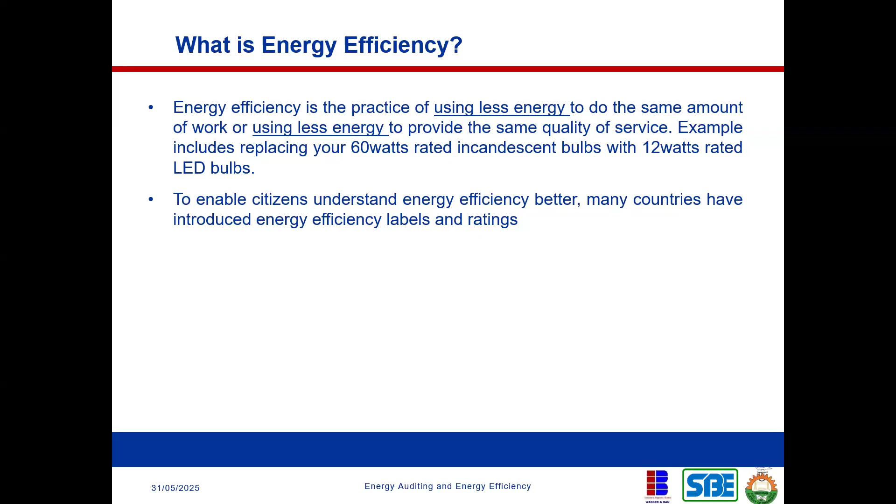Yes, we have them, but when you go to the market, when you want to buy an air conditioning system or a refrigerator, I don't see them. So these things already exist, but they are not fully implemented, right? So now these are examples of those kind of labels.

Now in America and some other parts of the world, you're going to have something like Energy Star. So depending on its efficiency, the more stars it has, the more efficient it is. Now that's Energy Star. Then the second one is the one for Nigeria. This is the rating for Nigeria, the building energy label.

So we have this already existing, not for all equipment. I know it's for air conditioning systems and refrigerators. I don't know if it has been extended to other equipment, but for air conditioners we have it, though I don't see them implemented. Then you have the third one. I think this is for India, I'm not so sure. Then this other one, I think it's for Europe.

So just to give you an example of what an energy efficiency label looks like, that's why I'm using these pictures to illustrate. So energy efficiency labels are logos or ratings used to designate or describe the energy consumption characteristics of a device or system. Now, this designation from a trusted agency means that the appliance exceeds the minimum energy performance standard, usually by a significant amount. Products without these labels are most likely inefficient in energy consumption. So this is the purpose of having the energy efficiency label.

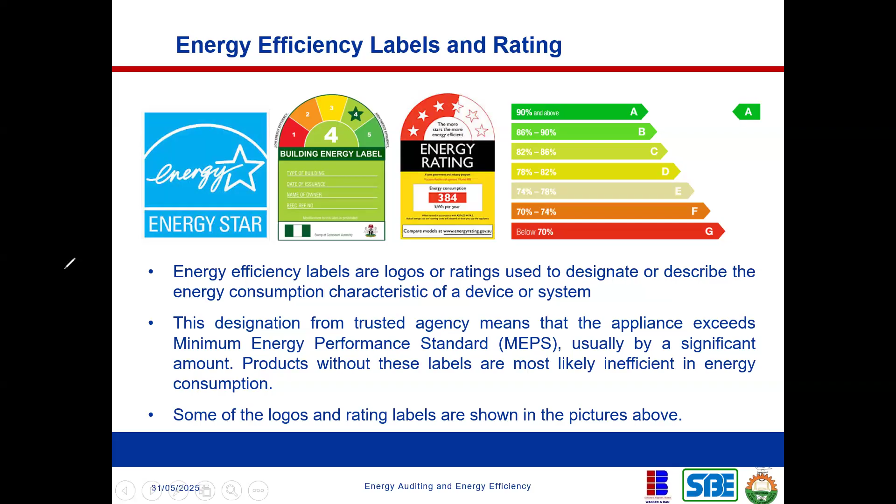Okay, so now let's look at the primary causes of inefficiency. So if you have your light bulb, mind you, even the energy efficient light bulb that we have today, the LED light bulb, does not mean that it has 100% efficiency, right? So it still has some level of inefficiency, but of course, it has been reduced significantly.

But again, the question is, what actually are the causes of this inefficiency in any system? So there are two primary factors of inefficiency in any system that you can think about. There is a human behavior factor, and then there's a technical factor. The technical factors are what we know as the technical losses. We are going to talk about this in a bit. But before that, let us look at how this comes together to affect the energy balance system.

So that takes us to an energy balance equation. As an energy auditor, what you're actually doing is energy balance. You have to look at all the energy that's coming into the building, and you try as much as possible to account for how all of this energy leaves that building, how the energies are expended. And that's what you do as an energy auditor.

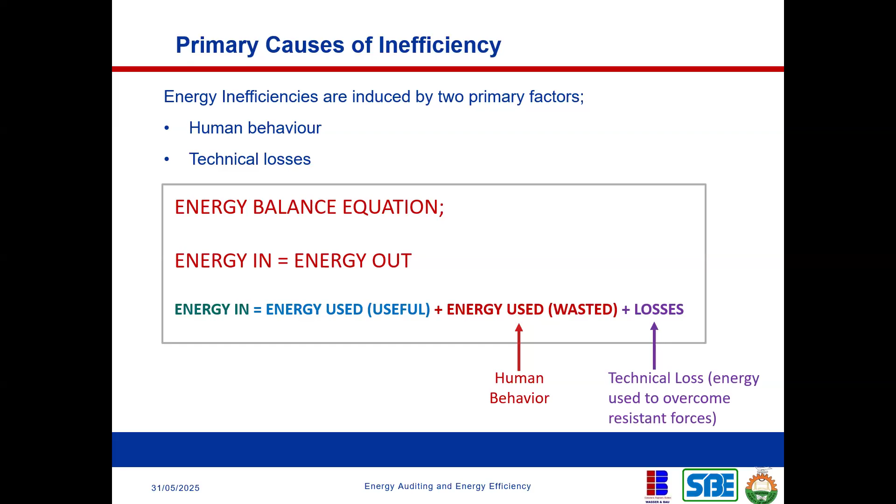So I was explaining this very screen and these primary energy efficiency measures, where I talked about the power and the hours. Do I need to go over this again? Please mute yourself if you're not speaking. So if you're able to reduce the power consumption of your appliance, for example the light bulb, if you change your 60-watt incandescent light bulb to a 10-watt LED, you've reduced the power. In that case, what you have achieved is energy efficiency, right?

But if you have done that and the 10-watt LED bulb is still on when there's nobody in that space, there is still waste, it's still an energy waste. So what you need to do is to turn it off when there's nobody. So when you turn it off, then you've actually done what we call energy conservation.

So energy conservation is the reduction in the hours of use of the equipment, while energy efficiency is the reduction in the capacity or in the power demand of the appliances. That's the difference between energy efficiency and energy conservation.

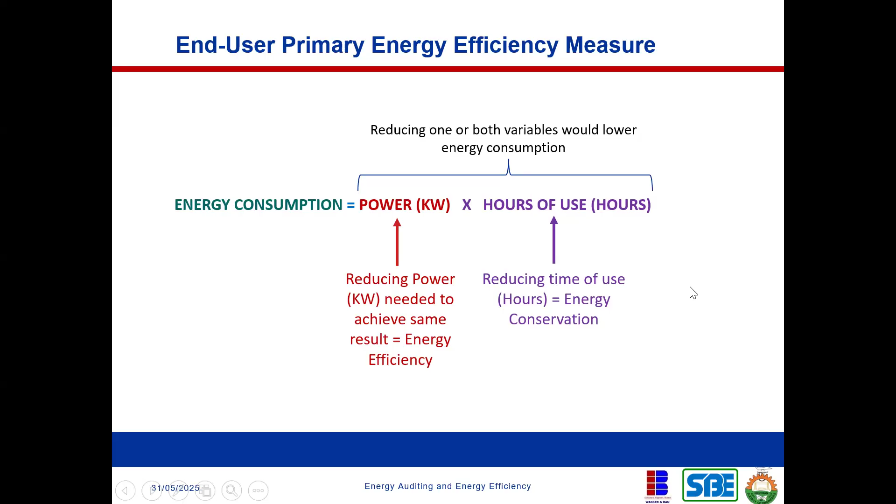So let's go into coefficient of energy efficiency. The formula for efficiency is the same almost everywhere: the useful output divided by the overall input. So in terms of energy, it's usually the useful energy divided by the total energy input into the system.

And how do you calculate the useful energy? It is actually the total energy that goes into the system minus the losses. Now, these losses include the technical losses and losses resulting from human behavior. When you do that, you can then actually see the real energy efficiency of the system.

So take an example of power production, maybe a power plant. Let me ask every one of us, what do you think is the efficiency of a diesel generator? What I mean by efficiency is, 1 liter of diesel contains about 10.7 kilowatt hours of electricity, if you convert everything to electricity. How much of that do you get from 1 liter of diesel? I want to get feedback.

Hello? Yeah, go on, please. There's nothing on my screen. Really? Is that the same for everyone? It is your network. No, it's fine here, I can see his screen. We still have coefficients of efficiency on our screen. Okay, so if you're not seeing my screen, then I think it's probably from your network. Now, unless you want to speak, please mute yourself.

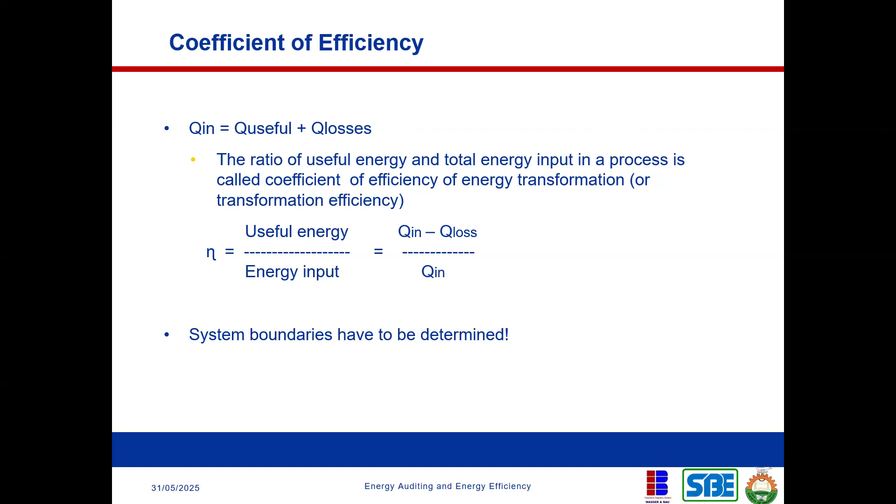Now, let's go into the energy efficiency in industries, the applications of energy efficiency in the industries. So when you go into an industry, what are you likely to see? You're likely to see a lot of motors. You're likely to see a lot of cooling systems. You're likely to see water pumping systems, compressed air systems. All of these are what you can see. You can see boilers and heat distribution systems.

So please mute yourself unless you want to ask a question.

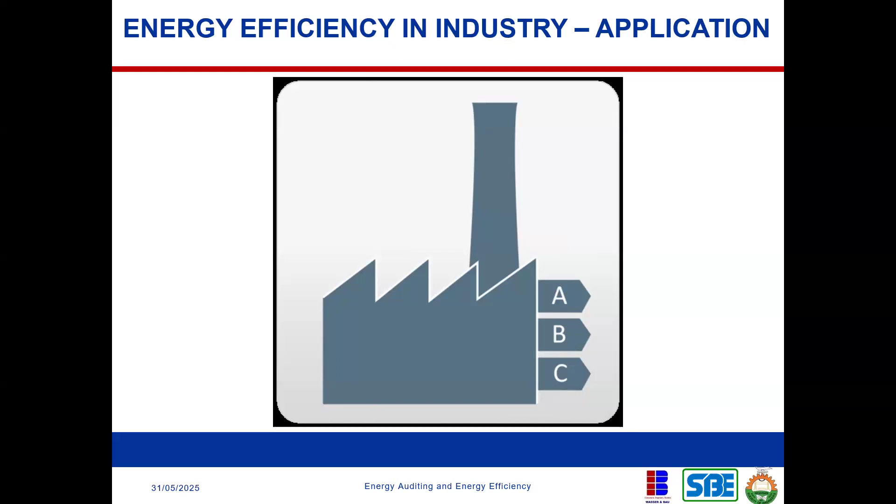So we're going to go through all of these applications, and then we're going to talk about the technologies and the energy system so that you can understand how they consume energy and things to look out for when you go out to these industries. So let us start from the very base, which is fuels and combustion. A lot of the time, this is where energy starts its journey, in the form of chemical energy, which is maybe petrol, diesel, coal, whatever it is, and they need to be combusted. They need to be burnt to free up the energy they have, and that energy has to be converted into different forms of energy.

So let's take an example, your diesel generator or your petrol generator. Let's take a petrol generator for an example. The petrol gets into the combustion chamber, and it gets burnt to free up the energy. So it's converted into thermal energy after the fuel has been burnt. That thermal energy is used to drive the piston, which is mechanical energy. Now that mechanical energy is used to turn the armature, which is actually producing the electricity. So you are converting from chemical to mechanical to electrical, which is the output.

So in all of these processes, you have energy loss. And that's why the efficiency of a petrol generator is actually lower than that of a diesel generator. But let's just come back to the industrial application. So combustion is simply a chemical process of converting hydrocarbon fuels to thermal or heat energy. It's a chemical process. It can be represented by a chemical formula.

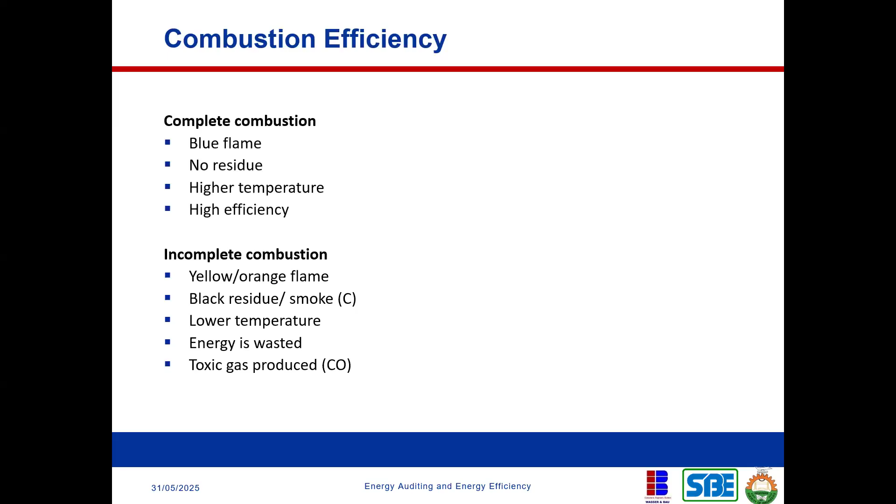So let us look at the combustion efficiency. Now, there's what we call complete combustion, and there's incomplete combustion. A complete combustion is where you burn all the fuel. Remember, in your combustion process, what we said is a chemical process.

If you have, for example, 10 kilograms of gas coming into your combustion chamber where it needs to be burnt up, burning up means you're going to split it up and release all the energy it contains. But if you're not able to achieve complete combustion, that means some fuel will go out without releasing their energy. So it impacts the efficiency of this process. The goal of combustion is to make sure you achieve complete combustion.

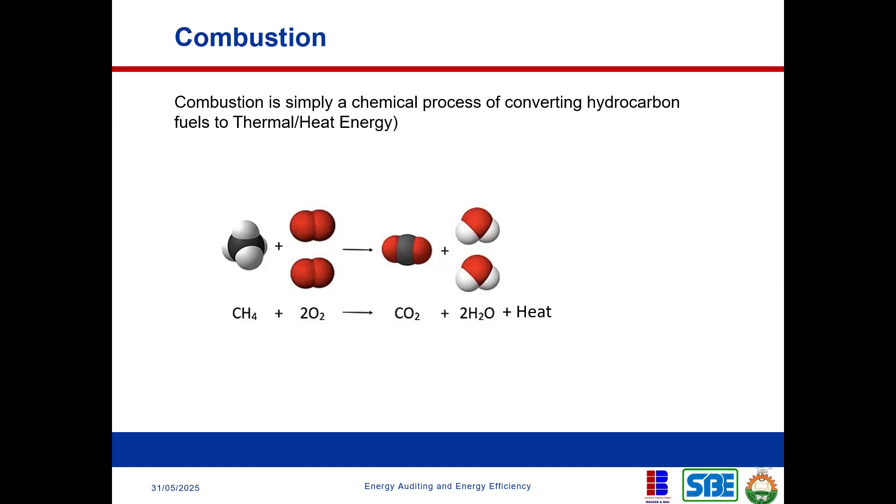So what are the things that hinder a complete combustion? Let me go back to that equation. If you don't have sufficient oxygen, you will not achieve a complete combustion. So this methane will not achieve complete combustion, and if that happens, what you're actually going to get here is carbon monoxide. Carbon monoxide becomes an indicator that we use to know when there is complete or incomplete combustion. We are going to come to how to test for that.

But for now, we are dealing with combustion, and we want to know what is a complete combustion and an incomplete combustion. If you look at these flames, flame number one shows you that there is an incomplete combustion. An example of this kind of combustion is firewood. You will know that with firewood, you can hardly burn everything up, and that's why you see this kind of yellow flame. So it's an incomplete combustion.

Now, a complete combustion is a typical example of your cooking gas, that is efficient, because some of them are still inefficient. When you see all these blue flames, then you know that yes, there's a complete combustion. So how do you know a complete combustion? The flame is blue, there is no residue, and that's why when you're cooking with gas you don't see black spots on your pot. It's an indication that yes, there's a complete combustion.

Now, when you compare that with firewood, you actually see all those black residues, which means there's an incomplete combustion. So for a complete combustion, there's no residue, the temperature is high, and it comes out with high efficiency. Now for incomplete combustion, you begin to see all those yellow or orange flames, black residue, low temperature, energy is wasted, and in some cases toxic gas is produced, which is carbon monoxide. CO stands for carbon monoxide.

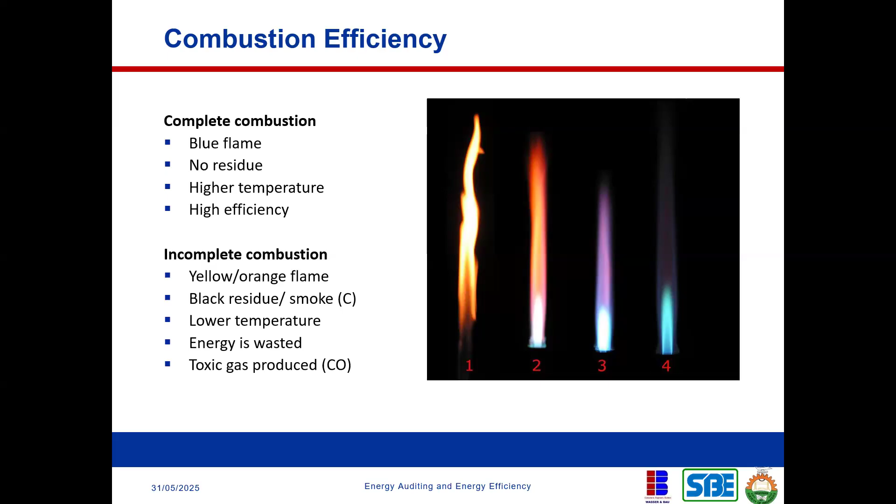So what is a complete combustion? To ensure complete combustion of the fuel used, combustion chambers are supplied with excess air. Remember that it must have the sufficient amount of air to achieve complete combustion, but you wouldn't know the right quantity of air required. So the idea is to slightly supply a bit more air than required. That's where the concept of excess air comes in. So you supply a little bit of more excess air to make sure that at least you achieve complete combustion. But if that excess air becomes too much, you also begin to reduce the efficiency.

We're going to see that in the diagram. So excess air increases the amount of oxygen to the combustion of fuel. When fuel and oxygen from the air are in perfect balance, the combustion is said to be stoichiometric. Stoichiometry is a scientific term. So the combustion efficiency increases with increased excess air until the heat loss in the excess air is larger than the heat provided by the more efficient combustion. We're going to see what that means.

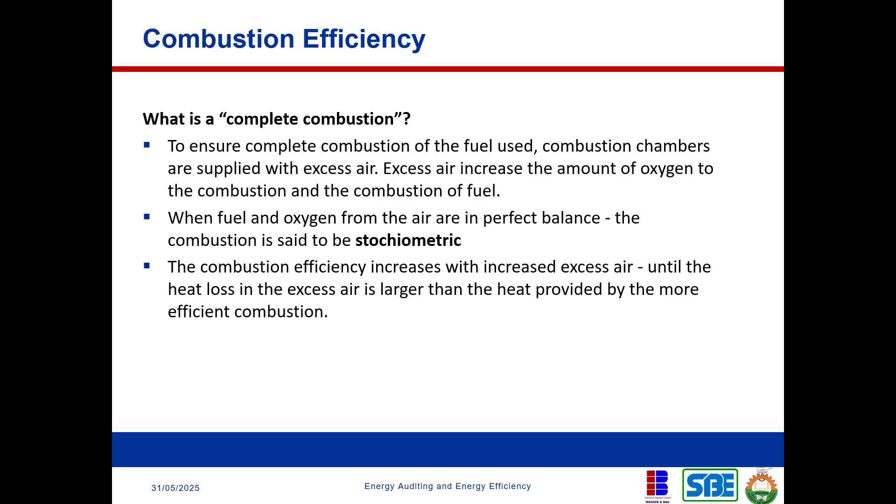So this diagram typically illustrates that. If you move to your left, it's excess fuel. If you move to your right, it's excess air. And in between, that's where you have your stoichiometric combustion, that is your most efficient point. Now look at the efficiency, the red line is the efficiency. The efficiency begins to drop the more you begin to add excess fuel. That means some fuel will not be combusted, so the efficiency begins to drop.

Now, if you begin to increase the excess air, which means you are increasing more of the oxygen, if you add excess air that is unnecessary, the efficiency will also begin to drop, because some of the heat will leave with the air as it goes out. So there has to be a balance somewhere.

This is the percentage of excess air that is required for different kinds of fuel. If you're using natural gas, most industries use gas to power their boilers. We're going to talk about the purpose of boilers and steam in the industry, but this is where the journey of the whole process starts, and that's why I want us to understand this.

If you're using fuel oil like diesel or some other form of heavy oil, it is required that you introduce about 5 to 20% excess air. Then if you're using coal, it is expected that you introduce about 15 to 60% excess air, to be able to achieve complete combustion.

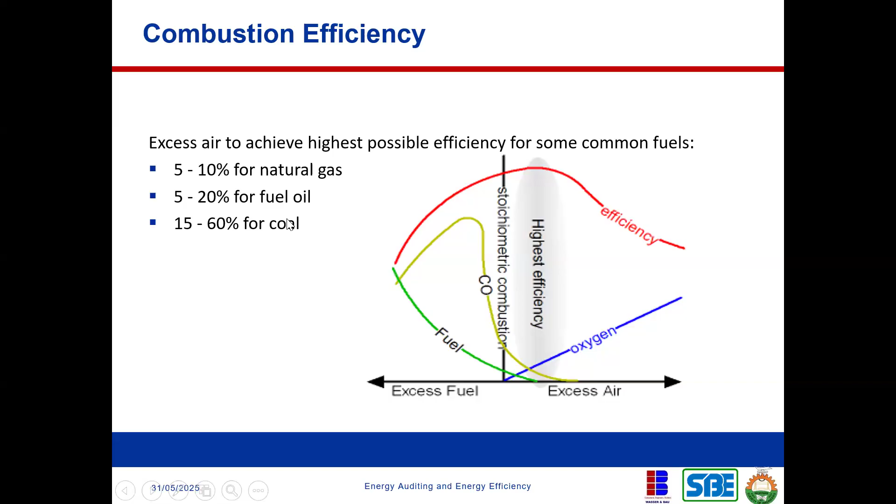Now, I talked about measuring the efficiency of a combustion chamber. How do you know when there's complete combustion or incomplete combustion? There's equipment called a combustion analyzer. You can see that on the screen. This is a combustion analyzer used for most boilers in the industry.

The exhaust pipe or the stack, some of them usually have a hole. It will be covered, but you just have to find a way to stick the probe of this combustion analyzer into the exhaust pipe. This combustion analyzer analyzes the exhaust, that is the air going out through the pipe.

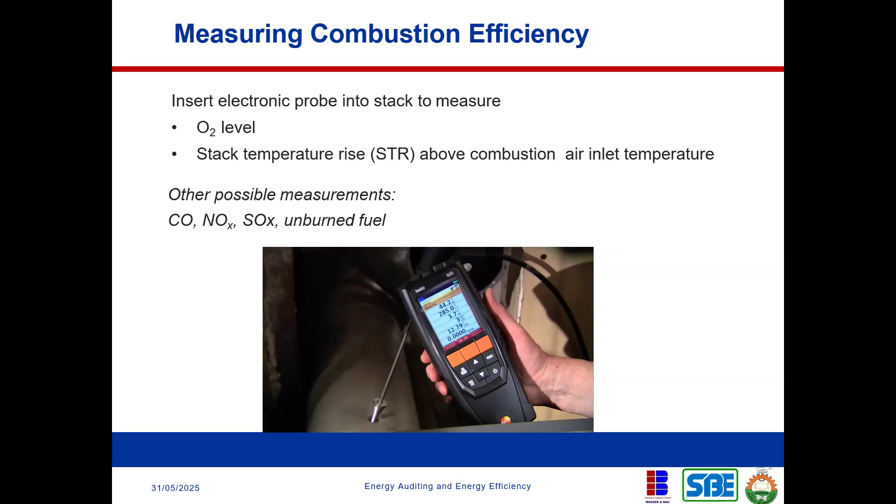This combustion analyzer will determine if there's carbon monoxide or not in the outlet chamber of the air, and it's going to tell you. The moment you begin to notice carbon monoxide, that tells you there's incomplete combustion. This tool also measures other forms of gas, to know if, for example, there are harmful gases actually going out into the environment. So this tells us a lot.

Now we've talked about combustion. Let's talk about boilers. Combustion chambers are actually inside a boiler, so the boiler is housing the combustion chamber. Now, the essence of the boiler is to convert water to steam.

Steam is a form of thermal energy, a form of heat energy used in the industry. If any production material needs to be heated, if the temperature of any production system needs to be raised, how do you take the heat to that production system so that you can raise the temperature? That is where the boiler comes in, and that's where steam comes in.

The same way you need electricity to drive your motors, you need an electrical network in your facility to move electrons to your machines. The same way, you have the heat distribution system in the industry that will move the steam to the equipment where it's needed. So the essence of the boiler is to provide or produce steam in industries.

Now there are two basic kinds of boilers: the water tube boiler and the fire tube boiler. I don't want to spend so much time here, the name explains itself. For the water tube boiler, you can see this is the boiler itself, and these are the tubes, the blue pipes.

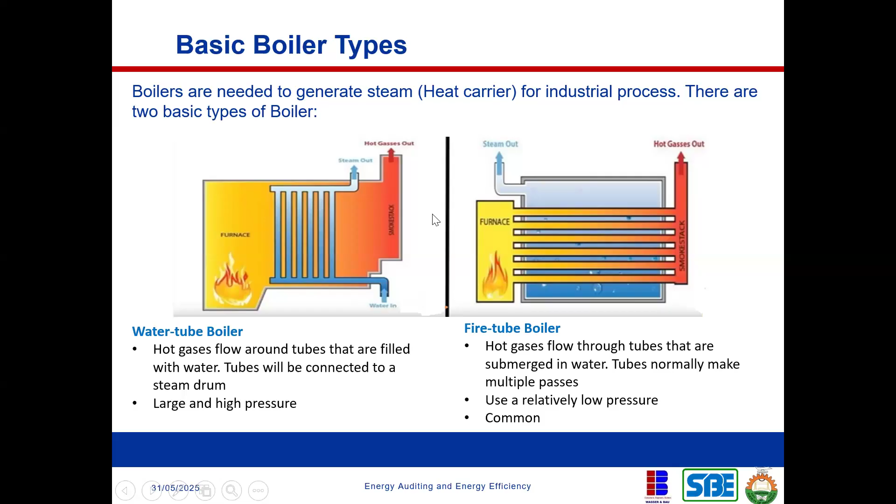This is a water tube boiler, and the second one is a fire tube boiler. Fire tube, as the name implies, fire is the one passing through the tube. You can see this is the drum, this is the combustion chamber. The heat produced from the fire passes through the tube, and the water here in the drum gets heated and leaves as steam, just like in the first case. So these are the two kinds of boilers that we have.

Now this is what is happening inside the boiler. I don't think I need to explain this again—I explained it before.

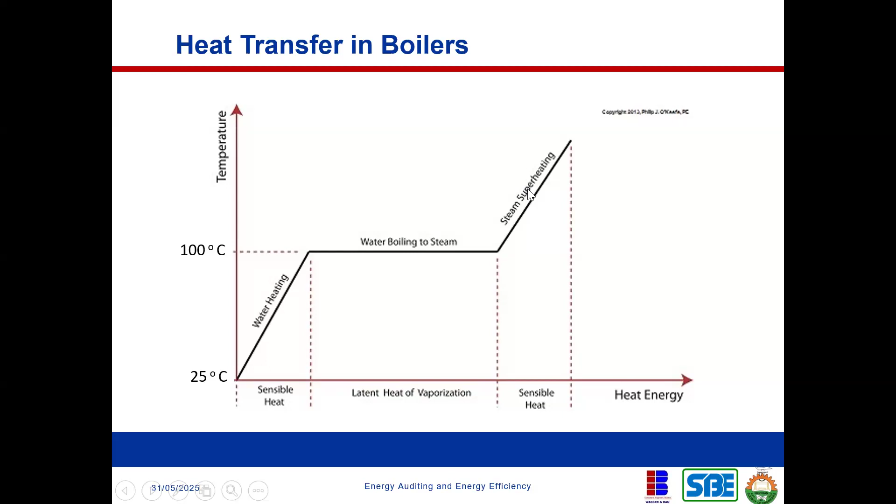It's very important that we understand how water changes phase with temperature. If you keep heating water, once it gets to 100 degrees, you keep applying heat, but the temperature will not increase. All the heat you're applying at that point is used to change the phase, from liquid to gas, so it converts to steam. Steam is water in the form of gas, and that is what you now distribute around your industry.

Now you also need to understand the heat flow equations. How does heat from the water raise its temperature to the point it becomes gas? How do you measure the energy content of the water? How do you measure the energy content of the gas when the water has become steam? All of this is what we need to handle with heat flow equations.

Remember I talked about sensible heat and latent heat in our previous class, and there was a reason I focused on them, because it is actually required—now we have to deal with these equations. Sensible heat is the heat you can feel; when your kettle is boiling and you bring your hand closer, you can feel the heat—that is sensible heat. But once the water gets to 100 degrees centigrade, you keep applying heat, but the temperature will not increase beyond that, because 100 degrees centigrade is the boiling point of water. Once it gets to that point, it begins to turn to steam, and at that point what is actually happening is latent heat of vaporization, no longer sensible heat. So there are different equations to calculate this.

If you want to calculate sensible heat: say the water coming from your pipe is 30 degrees, but you want to heat it from 30 degrees to 80 degrees—that is sensible heat, it's still water. How do you calculate the energy you've added to that water? If you're using electricity, how do you calculate the energy converted or absorbed by that water? Because at that point the water contains energy—how do you calculate that energy content? That is what these equations help us do. Even when the water has been converted to steam, how do you calculate the energy content of that steam? That's what these equations help us do.

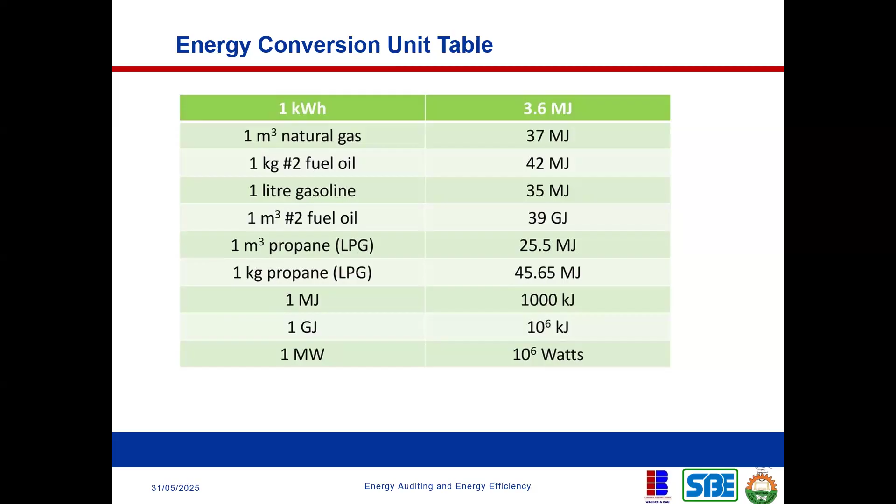So this is just a quick test question. Heat which when added or subtracted does not result in change of temperature is called what? Just a quick answer. Latent heat. Thank you very much. It's latent heat.

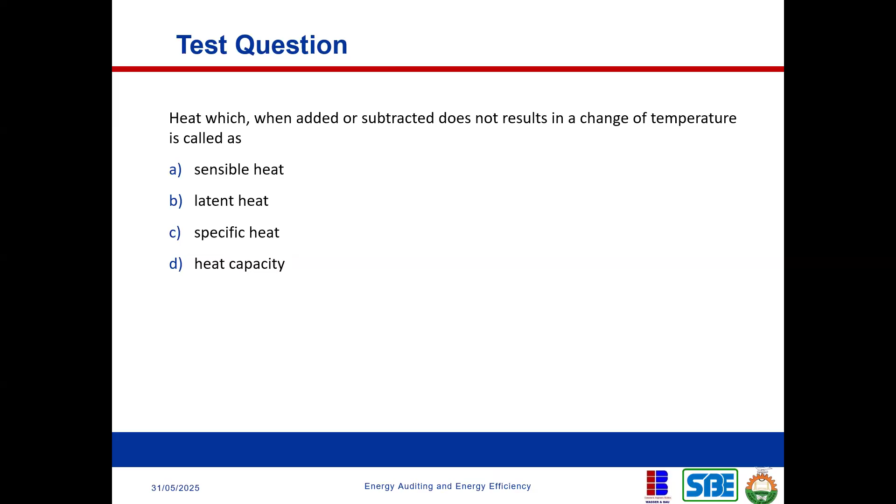So another simple question. How much heat is required in kilowatts to raise the temperature of water flowing at 100 kilogram per hour? So every hour, 100 kilogram of water passes through that pipe, and you want to raise the temperature from 20 to 100 degrees. Which formula are we going to use? You're raising that water from 20 to 100. Which formula are we going to use?

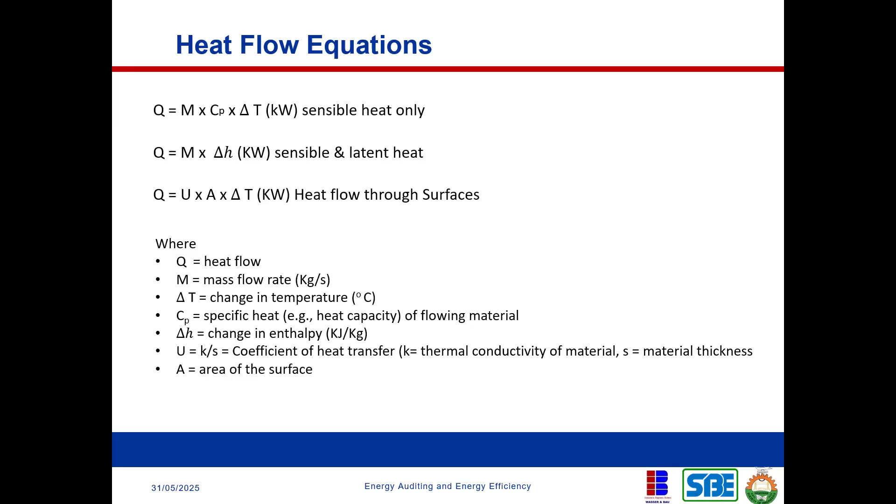The first one. Is it, exactly. So thank you very much. It's a sensible heat. You're not going above 100. It's a sensible heat, so you're going to use the first formula. Please, you can just copy out this formula. I give you maybe 2 seconds to copy out the formula so you can solve that question. So I want you to use that formula to solve the question.

Now, you have been given the specific heat of water. Remember, I told you that water has a specific heat of 4.2 kilojoule per kilogram per degree centigrade. So for every degree centigrade you raise water, if you raise 1 kilogram of water from 1 to 2 degrees centigrade, you have actually added 4.2 kilojoule of energy into that water.

Now, if you have copied that formula, it is asking you what is the heat required in kilowatt to raise that temperature. So your temperature difference, your DT, is 100 minus 20. Your mass flow rate is 100 kilogram. Your specific heat is already given, 4.2. So you just do the calculation and let me know what you get. 33,600. Thank you very much.

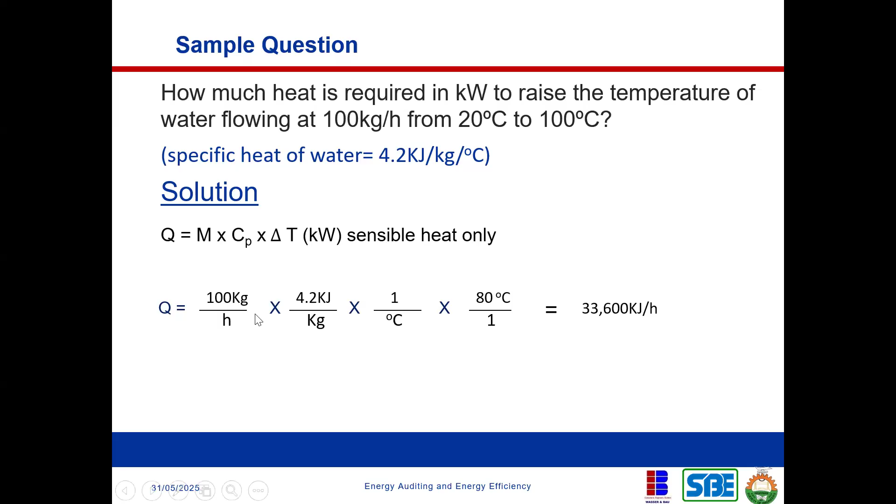So you get that, but now the question is a little bit tricky. 33,600 kilojoule per hour. Now be very careful with units. You can see how in the solution, I try to maintain the unit. Your mass flow rate, 100 kilogram per hour, times your specific heat, 4.2 kilojoule per kilogram per degree, times your change in temperature. So if you cancel the temperature, it goes out. You cancel the kg, it goes out. So what is remaining is kilojoule per hour. You don't have to throw it away. It's still part of your answer.

Now, the question is asking you to provide this answer in kilowatt. So you need to convert this to kilowatt. Remember when I said that 3,600 kilojoule is equal to 1 kilowatt hour. So replace this 33,600 kilojoule by kilowatt hour. 9.33, perfect. 9.33 kilowatt hour, correct? So the hour, we cancel the hour. You will be left with only kilowatt. Is that correct?

So this is the answer. This is how you solve the question. When you convert by 3,600 kilojoule to kilowatt hour, what you have is 9.33 kilowatt hour. You divide it by the hour, so we cancel this hour. What you're left with is 9.33 kilowatt. Okay. So any questions so far?

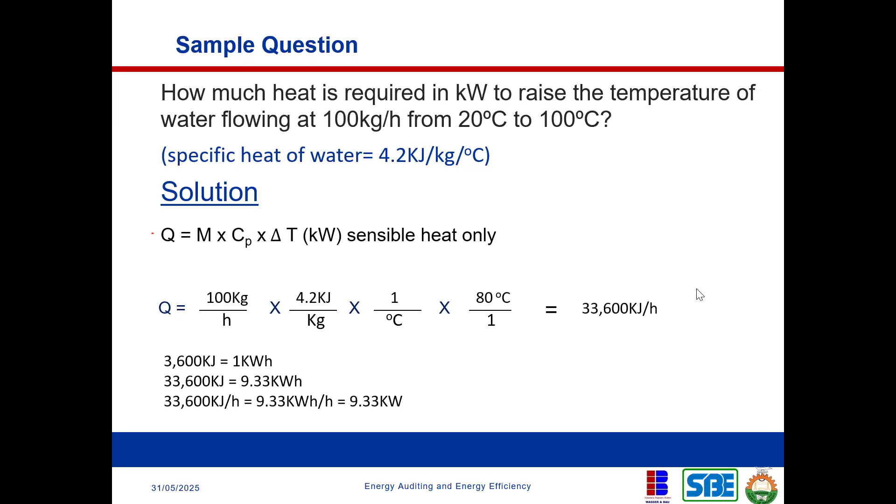Okay, so let us look at energy losses in boilers. We've looked at how boilers work, the energy transfer systems in boilers. Now let us look at energy losses in the boiler system. So these are the two kinds of boilers, like I said. What are the energy sources and the ranges of losses that occur? In the second column, you have heat in flue gases. The flue gases are the gases of combustion that leave through the stack or the exhaust pipe.

Now, who is drawing on my screen? David, please.

So when you burn any sort of fuel, the flue gas in some cases contains a high amount of heat, and you send it out into the environment. So this presents a huge source of heat loss in the system. And there's also heat in the moisture content of the flue. Now, remember when we looked at the chemical process of combustion.

Thank you very much for erasing it.

When you look through the chemical process of combustion, you would see that water is also a product of combustion. And that water is not visible. It's like moisture, because it's passing through a high temperature. So it's not the kind of water that flows. It's like steam, but it's actually water. Whether in the form of steam or liquid water, it has the same chemical formula, which is H2O. However, their temperatures vary.

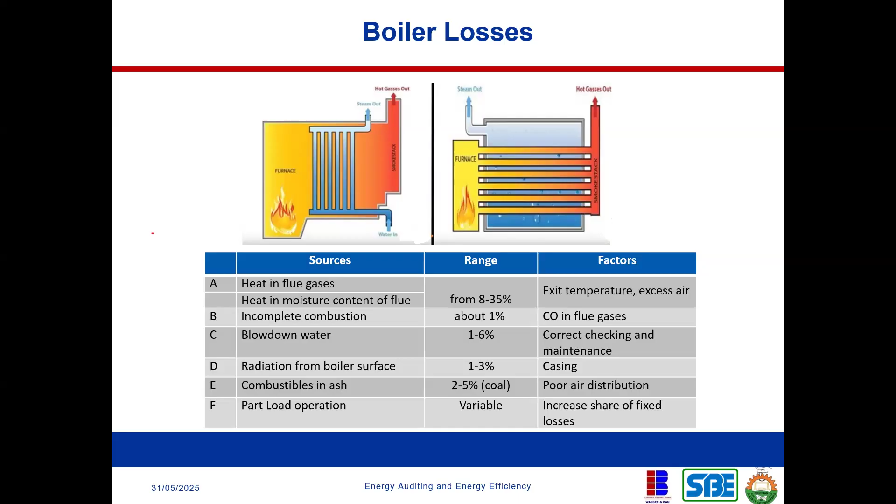So now we're talking about energy opportunities in the boiler system. There's what is called installation of economizer. I will explain what that means. Installation of economizer, combustion air preheat. Remember for combustion you need oxygen, so you need to introduce air. But imagine that the air that you're introducing is already preheated. It will increase the efficiency of the process, and the heat that the air contains will already be transferred into converting the water to steam quickly.

There's combustion control, blow down optimization, heat recovery, installation or repair of insulation, load management, variable speed drive or fan. We're going to explain some of this as we proceed in the training. There's boiler replacement. If you have an old inefficient boiler that is more than maybe 20, 15 or 10 years old, in some cases it makes sense to replace it. In other cases, you might just have to retrofit it with certain technologies to make it more efficient. There are also general housekeeping measures.

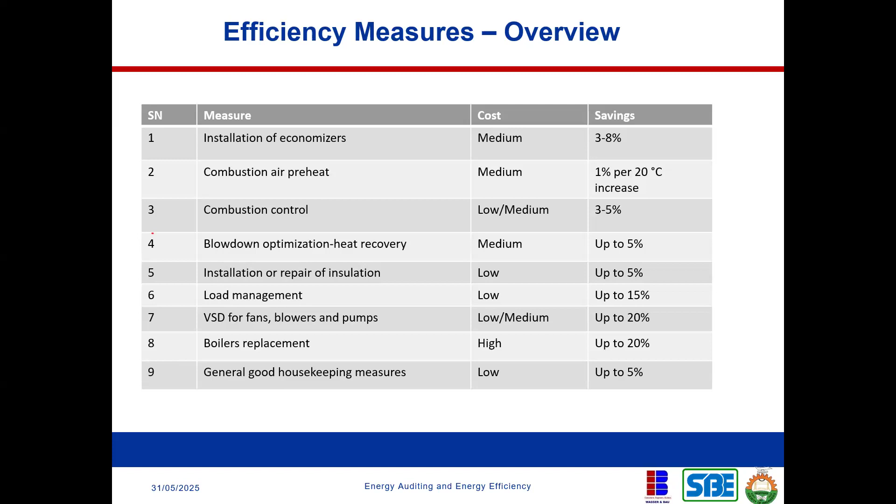Now I talked about economizer. If you look at this, number one there is installation of economizer. Now let us look at what that means. This is your boiler, right? Now this is the flue. This is the flue gas. This is where the flue gas leaves.